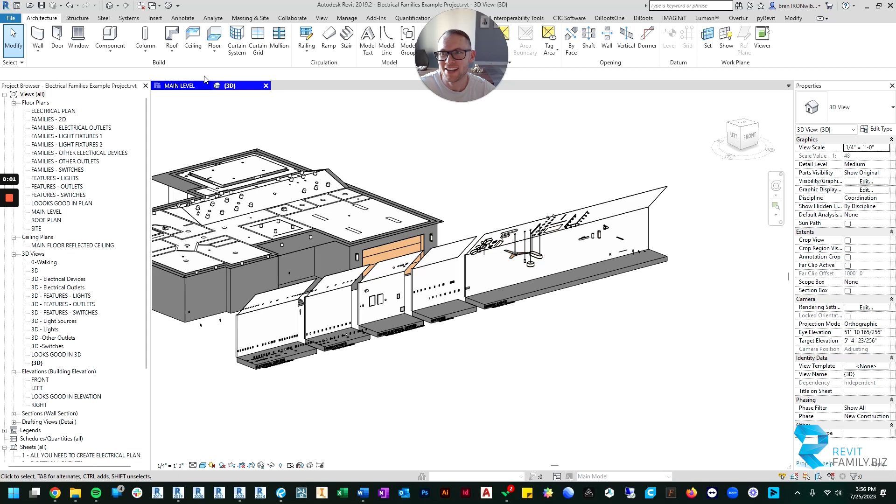Alright everyone, your days of struggling with residential electrical floor plans is over, hopefully. I've been working on these families for a long time, and you guys have been asking for them for a long time too. When you buy these families, you'll get this example file we're looking at right now.

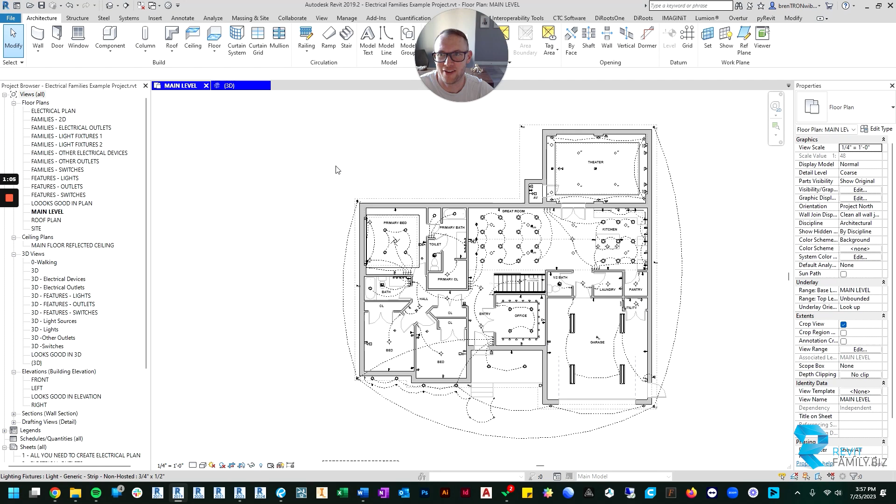That shows you a full floor plan with the full electrical plan, with the wiring diagram, all the lights, outlets, switches—all of that comes in it. So if you want to easily do what you're seeing here, I'd suggest you take a good look at these families.

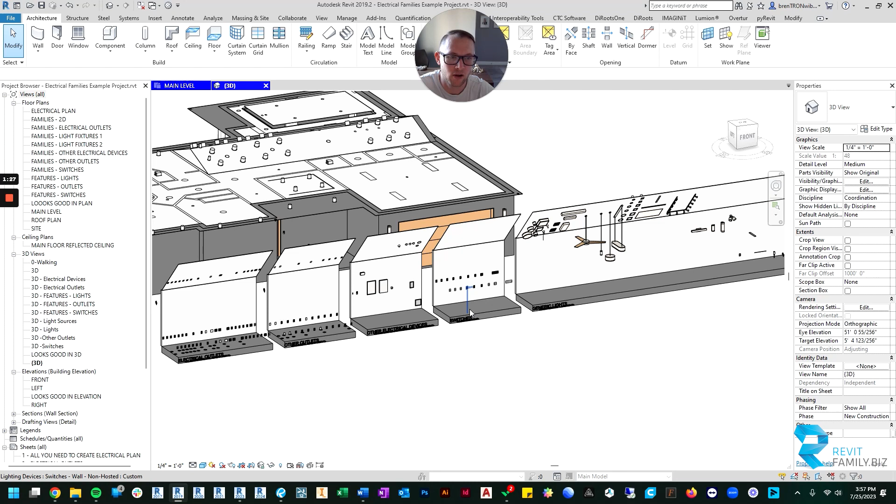So, how I've done this: in order to release these as quickly as possible so you guys can start using them and start solving your problems with your electrical plans, I'm going to roll this out in phases. This is phase 1, and I'm calling it the electrical starter pack. It comes with everything you need to do electrical plans.

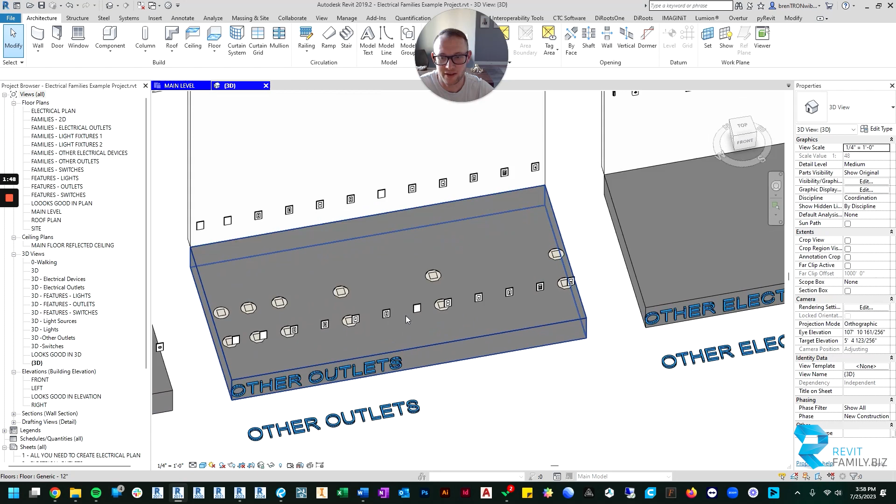It comes with electrical outlets, just about every electrical outlet you could possibly need—both wall hosted, ceiling hosted, floor hosted, and some non-hosted versions. It also comes with other AV outlets: data, phone, audio jacks, coaxial cable jacks, and anything else that might be an outlet but not specifically electrical.

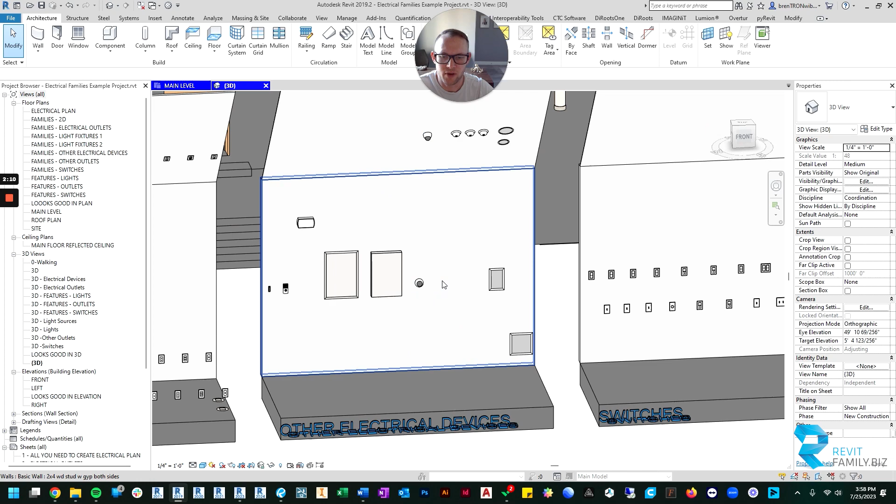Then we've got some other electrical devices like doorbells, electrical panels, security cameras, smoke detection, and recessed speakers, both on the wall and on the ceiling, for if you're doing surround sound in home theaters or anything like that.

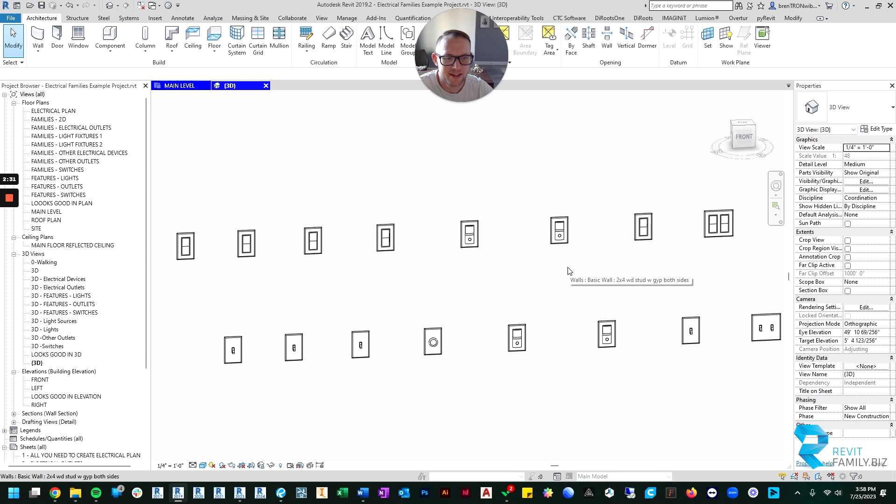Then we've got some really good switch families that look correct—multiple gang switches, not just single switches, which is what I think all of us have been used to using. And then I've got almost any light, hopefully, that you can conceive of, any type of light.

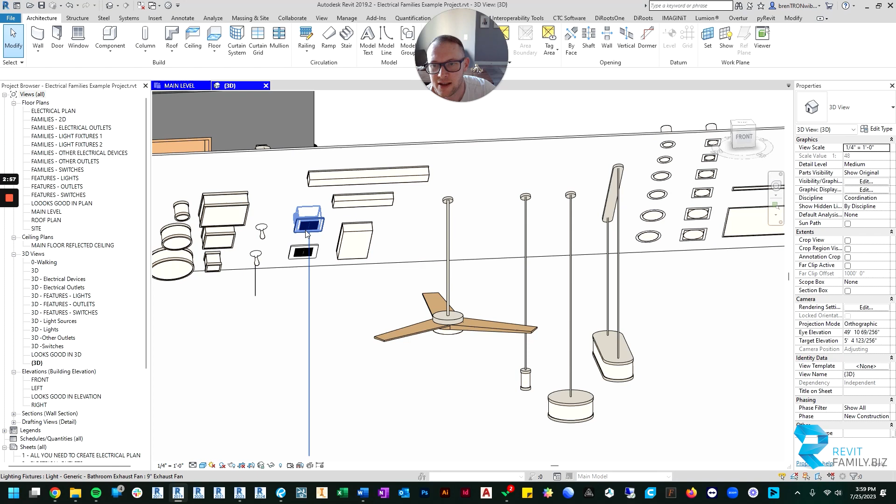We've got flush mounts, we've got just sockets, we've got surface mount box lights, exhaust fans, ceiling fans, pendants, chandeliers, linear recessed lighting, recessed can lighting, both square and round, and track lighting.

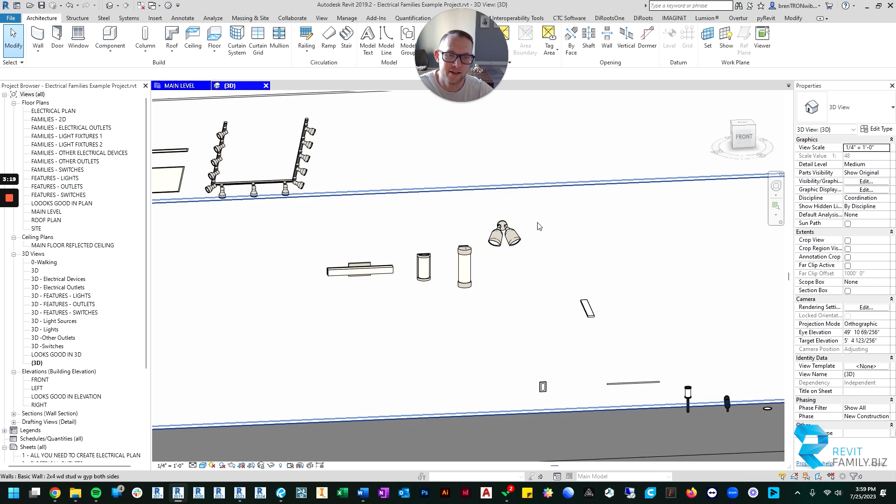We've got bathroom vanity sconces, and a couple other sconces. We've even got night lights for the stairs that are recessed in the wall. Then we've got strip lighting for underneath cabinets or maybe up in trough ceilings or tray ceilings, plus a couple exterior lighting options for landscaping.

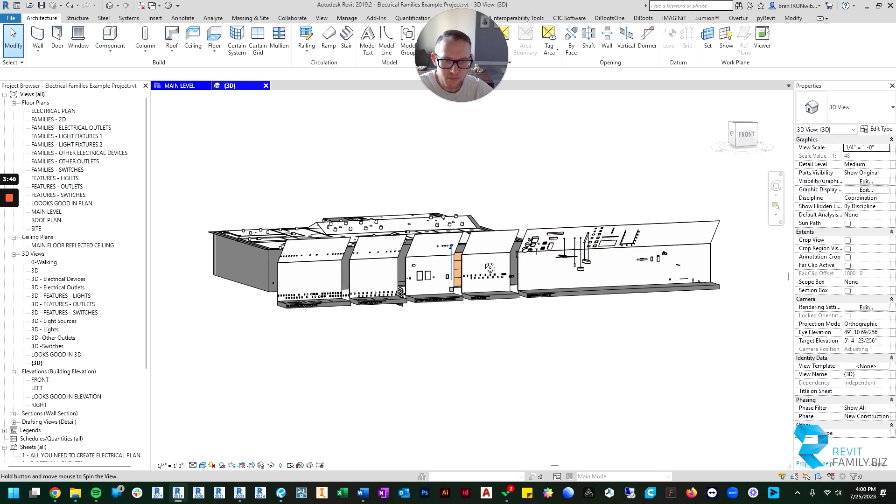So all of that comes in what I'm calling the base package. Then in the future, pretty soon, I hope to be releasing more lighting options, so there'll be future expansion packs in different styles.

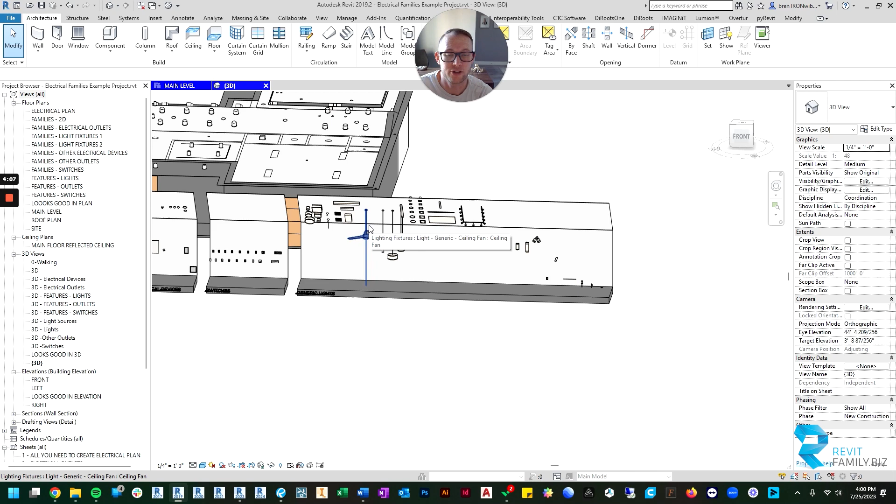Right now these are kind of a generic style, meant to help anyone who's just trying to get lighting in 3D, create their electrical plan, and render something nice using all of these light fixtures. But we recognize there's a segment of you using our families who are going to want better looking light fixtures.

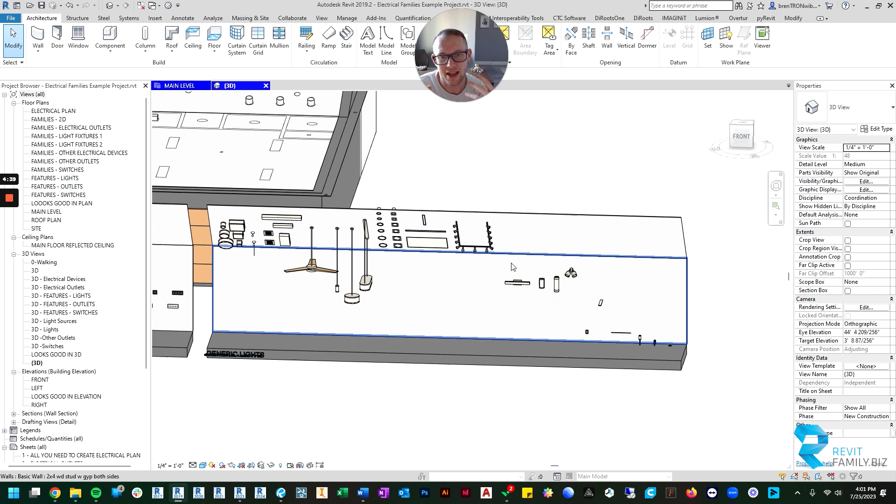So we're going to take time in the next couple months to half a year to start developing lights in cooler styles—maybe modern, traditional, contemporary style lights—so you have better options for chandeliers and surface mount lights. Those are coming in the future, but for now, everything you'll need is in this base package.

And in the future packages, you can just buy lights as you need them—you don't have to buy all the outlets in different styles, it's just going to be the lighting. So you'll see those expansion packs pop up throughout the next year. And if you have any requests, we also take requests.